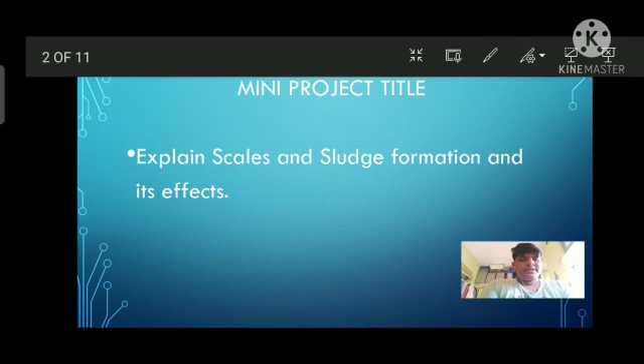Today I am presenting you my mini project. My mini project name is: Explain Scales and Sludge Formation and its Effects. Let's get started. Sludge and scale formation in boiler.

In a boiler, water is continuously evaporated to form steam. This increases the concentration of dissolved salt. Finally, a stage is reached when the ionic product of this salt exceeds the solubility product, and hence they are thrown out as precipitates.

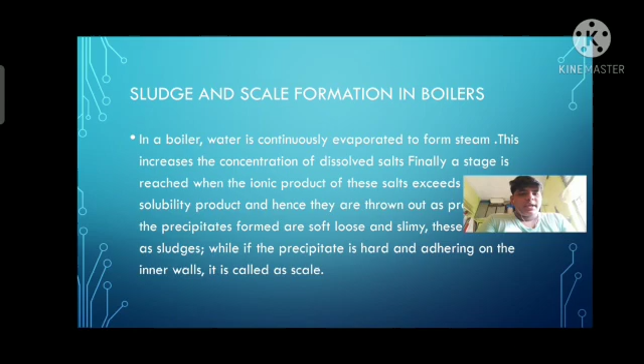Precipitates formed that are soft, loose, and slimy are known as sludge. While if the precipitate is hard and adhering on the inner wall, it is called scale. Sludge. Sludge is a soft, loose, and slimy precipitate formed within the boiler.

Sludge-forming substances have greater solubilities in hot water than in cold water. Example: MgCO3, MgCl2, MgSO4, etc. They are formed at comparatively colder portions of the boiler and get collected at places where the flow rate is slow. They can be easily removed, scraped off with a wire brush.

If sludges are formed along with scales, then the former gets entrapped in the latter and both get deposited as scales.

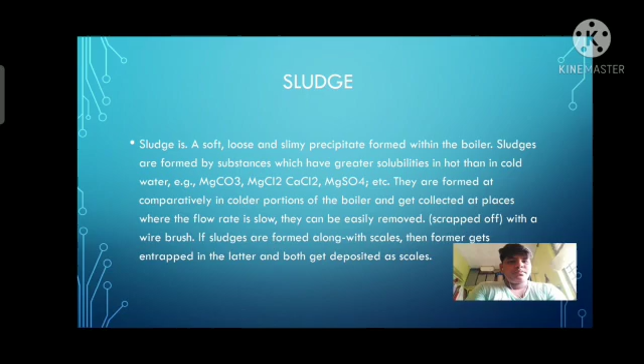Advantages of sludge. The system itself does not cost much to install, providing a good return on initial investment. The effluent water produced is of good quality as long as the sewage is of a uniform type and volume, and the activated sludge stays activated.

It does not require much room to install and operate the system within your facility, making it a good option for applications where space may be at a premium. There are very few odors or pests involved, which makes hygienic, safe, and convenient operation easy. The process is relatively efficient, and there should be very little loss of pressure within the system.

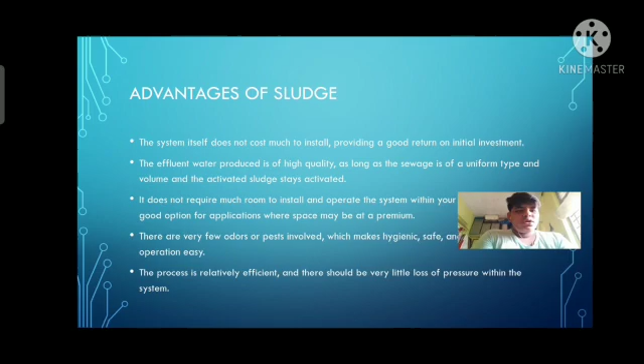Disadvantage of sludge formation. Sludges are poor conductors, so they tend to waste a portion of heat generated and thus decrease the efficiency of the boiler. Excessive sludge formation disturbs the working of the boiler. It settles in regions of poor water circulation, such as pipe connections, plug openings, gauge glass connections, thereby causing even choking of the pipes.

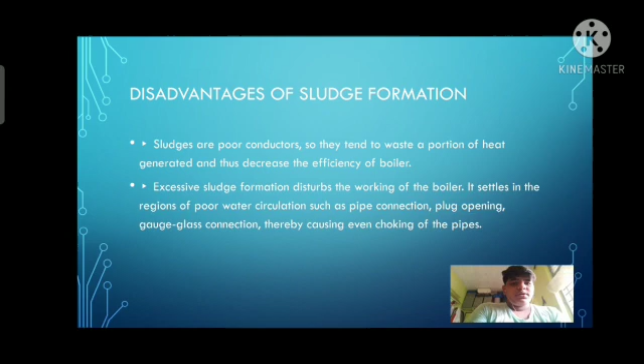Prevention of sludge formation. By using soft water, by frequent blow down operation, for example, partial removal of concentrated water through a tap at the bottom of the boiler when the extent of hardness in the boiler becomes alarmingly high.

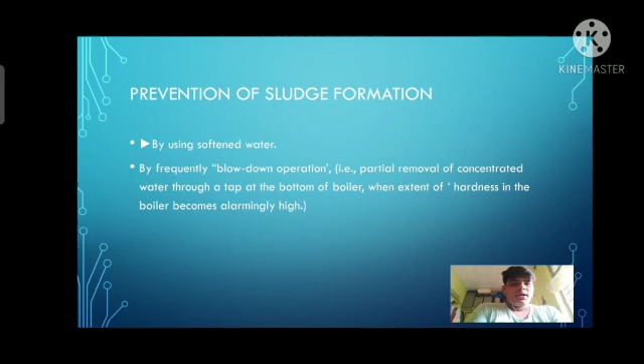Scales. Scales are deposits firmly sticking to the inner surface of the boiler. They are difficult to remove even with the help of hammer and chisel, and are the main source of boiler troubles. First, scales may be formed inside the boiler due to decomposition of calcium bicarbonate: Ca(HCO3)2 gives CaCO3 plus H2O plus CO2.

However, scale composed chiefly of calcium carbonate is soft and is the main cause of scale formation in low pressure boilers, but in high pressure boilers CaCO3 is soluble due to the formation of Ca(OH)2: CaCO3 plus H2O gives Ca(OH)2 plus CO2.

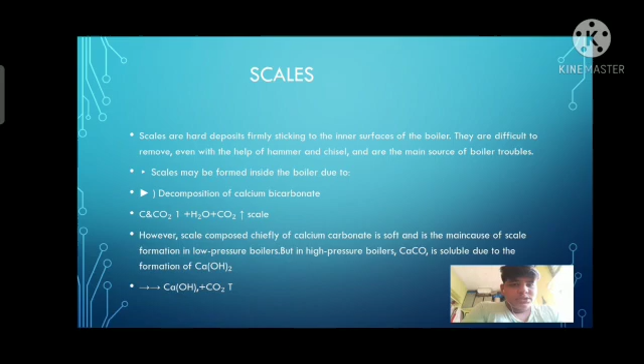Disadvantage of scale formation. First, wastage of fuel. Scales have poor thermal conductivity, so the rate of heat transfer from boiler to inside water is greatly reduced. In order to provide a steady supply of steam, excessive heating or overheating is done, and this causes increased fuel consumption.

Second, lowering of boiler safety due to scale formation. Overheating of the boiler is done in order to maintain a steady supply of steam. It makes the boiler material softer and weaker. This causes distortion of boiler tubes and also makes the boiler unsafe to bear the pressure of the steam, especially in high pressure boilers.

Decreased efficiency: deposition of scale in the valves and condensers of the boiler chokes them partially. This results in decreased efficiency of the boiler.

Danger of explosion. When thick scales crack due to uneven expansion, the water comes suddenly in contact with the overheated portion and a large amount of steam is formed instantaneously. This results in development of sudden high pressure, which may cause explosion of the boiler.

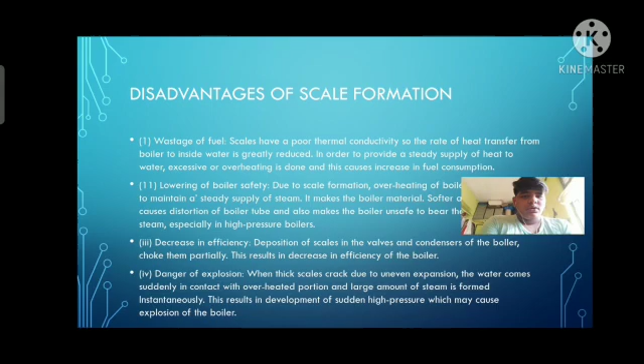Removal of scales. Scales are removed by mechanical methods or by chemical method. First, if the scales are loosely adhering, they can be removed with the help of a scraper or piece of wood or wire brush. Second, if the scales are brittle, they can be removed by giving thermal shock, for example, heating the boiler and then suddenly cooling with cold water.

Third, if the scales are loosely adhering, they can also be removed by frequent blow down operation. Blow down operation is the partial removal of hard water through a tap at the bottom of the boiler when the extent of hardness in the boiler becomes alarmingly high. Makeup water is addition of fresh softened water to the boiler after blow down operation.

Fourth, if the scales are adhering and hard, they can be removed by dissolving them by adding chemicals. Example, CaCO3 scales can be dissolved by using 5 to 10% HCl. Calcium sulfate scales can be removed by adding EDTA, since the Ca-EDTA complex is highly soluble in water.